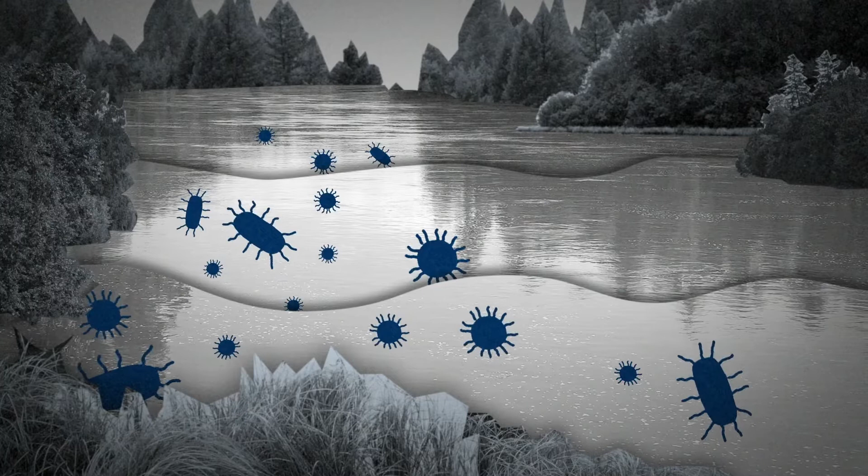In the second half of the 19th century, the German chemical engineer and hygiene pioneer Max von Pettenkofer formulated the concept of natural self-purification. With this term, he referred to the biological degradation of contaminants and pollutants in water bodies using the metabolic properties of bacteria and other microorganisms. In simple terms, microorganisms use contaminants as food and thus convert them into water, carbon dioxide, and nitrogen.

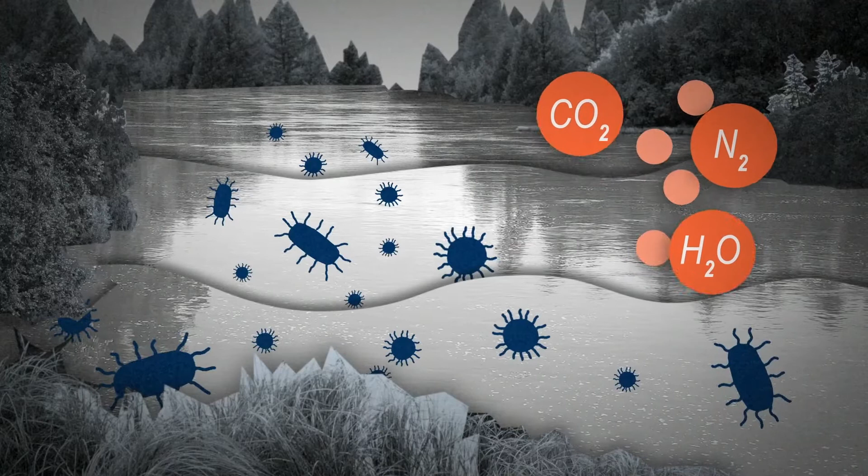This gave rise to the question of how much contamination a river or water body can absorb before it stops purifying itself, and excessive pollution, also known as eutrophication, takes place.

Max von Pettenkofer also demonstrated the connection between hygiene, drinking water quality, sickness, and the spread of diseases. To support his theses, he exposed himself to cholera in a self-test and survived it without serious health consequences.

His ideas led to the construction of the first sewers and wastewater treatment plants, initially in cities only. Today, every biological wastewater treatment plant uses the natural self-purification process described by Pettenkofer.

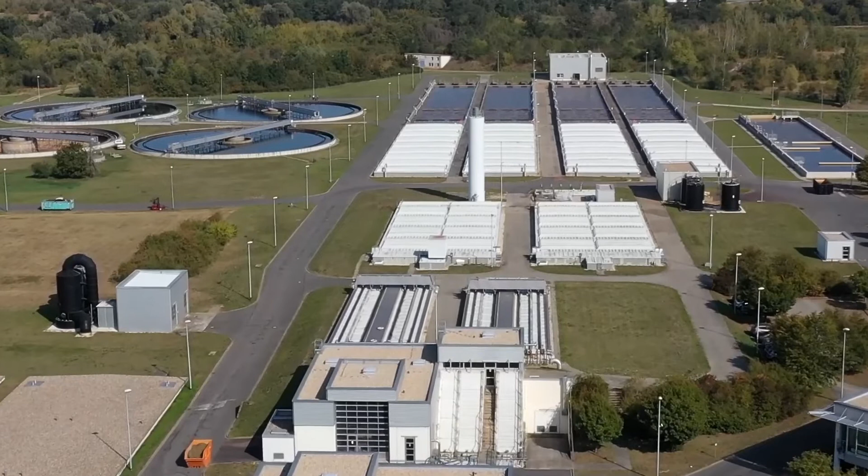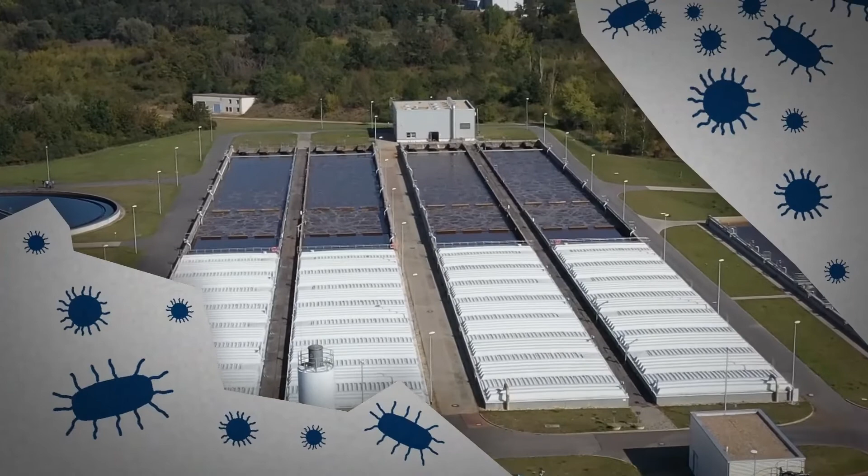A difference to naturally occurring water bodies is that in wastewater treatment plants, a near-perfect environment can be created for the bacteria and microorganisms to thrive. This increases their number to a maximum and highly accelerates the natural self-purification process.

The size of a treatment plant depends on the amount of wastewater occurring. Typically, the wastewater to be treated stems from domestic, municipal, and industrial use, as well as from rainfall.

Wastewater contains dissolved and undissolved substances, which can be of organic or inorganic origin. In some cases, wastewater also contains heavy metals and salts, which are dissolved in the water.

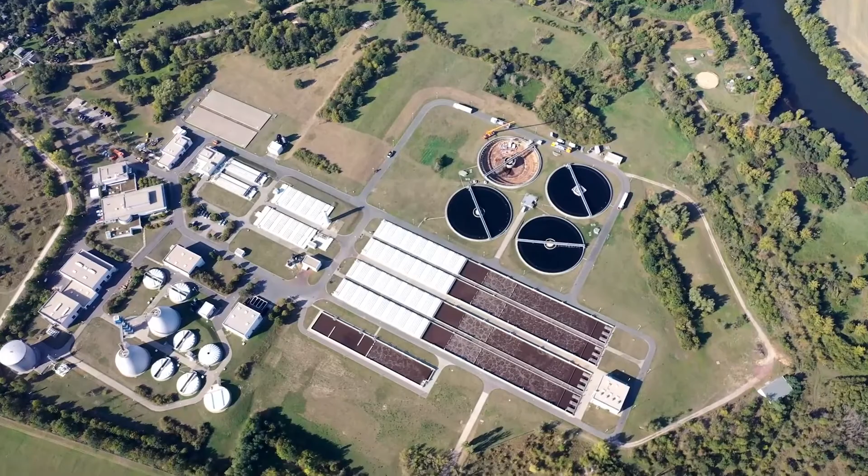Here you can see our modern wastewater treatment plant in Halle. Let's take a closer look at its structure. The treatment plant consists of 3 areas: mechanical treatment, biological treatment, and sludge treatment.

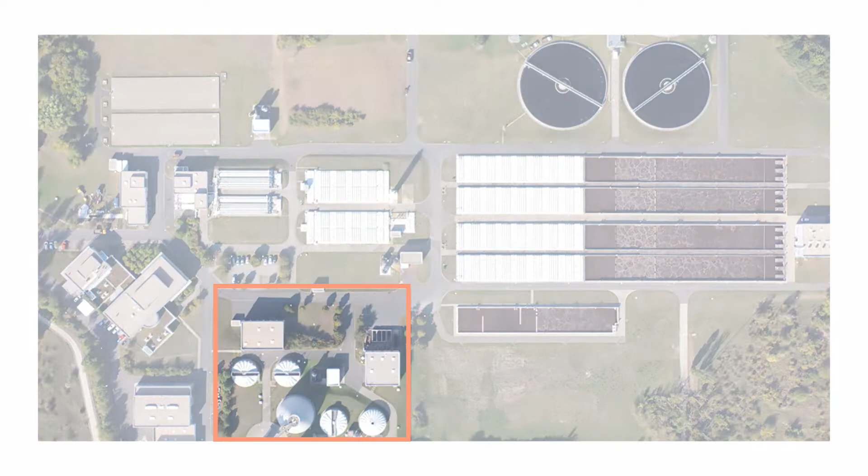Mechanical treatment starts with a screen, followed by a sand trap and grease separator. It finishes with the primary clarification. The aim of mechanical treatment is to remove all floating substances and solids from the wastewater.

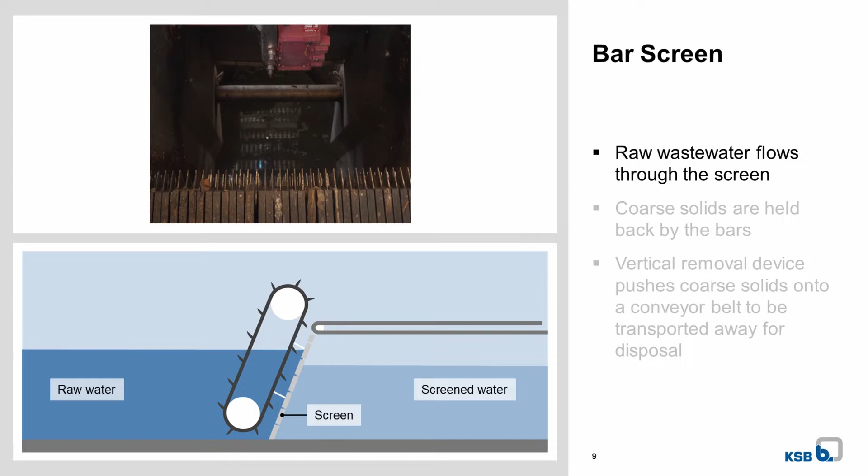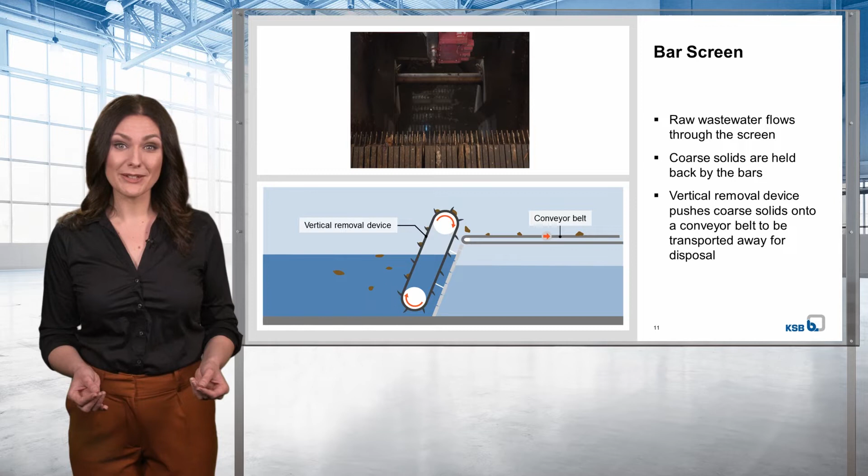The screen filters coarse solids out of the wastewater. It consists of fixed bars arranged at a defined spacing from one another. The raw wastewater flows through the screen. Coarse solids are held back by the bars. A vertical removal device pushes them onto a conveyor belt to be transported away for disposal.

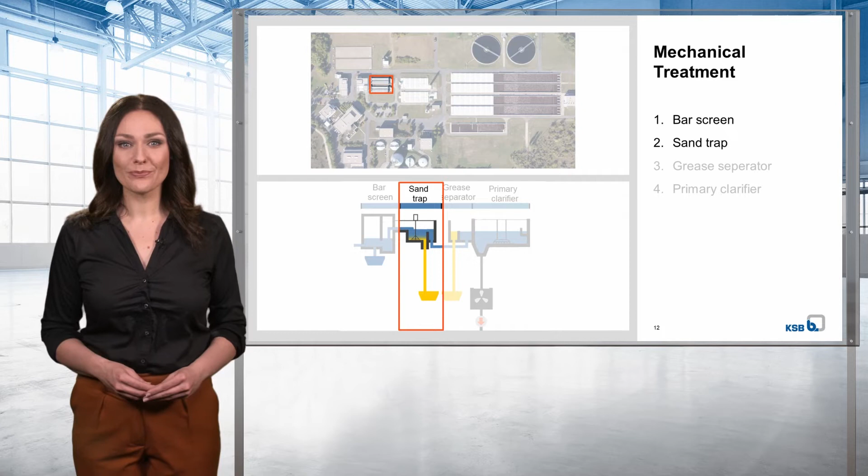The wastewater then continues to the sand trap, which can be either an aerated or a round type. Here you can see an aerated sand trap. Air bubbles rise from an aeration system mounted on the tank floor and make their way to the top.

This results in a vertical flow impulse in the tank and makes the wastewater rotate vertically, which separates heavy particles such as sand. Once these particles have reached the bottom, they fall into a drain channel, also called a sand trap channel. A scraper then pushes them into a sump, and some kind of pump transports it away.

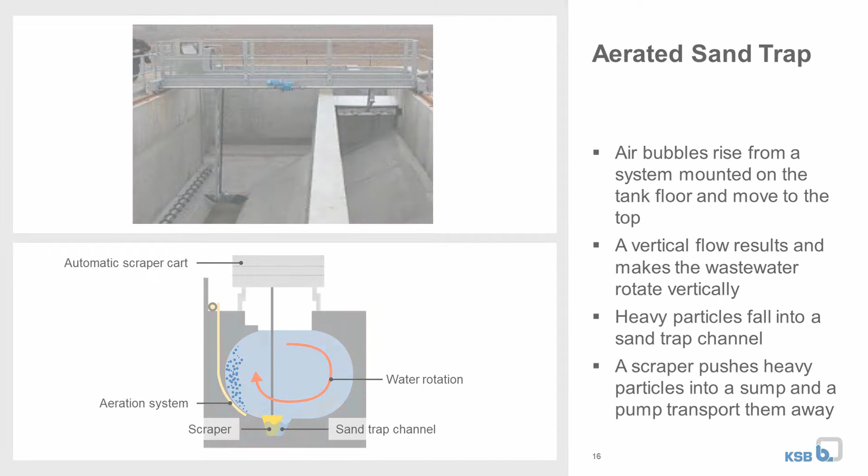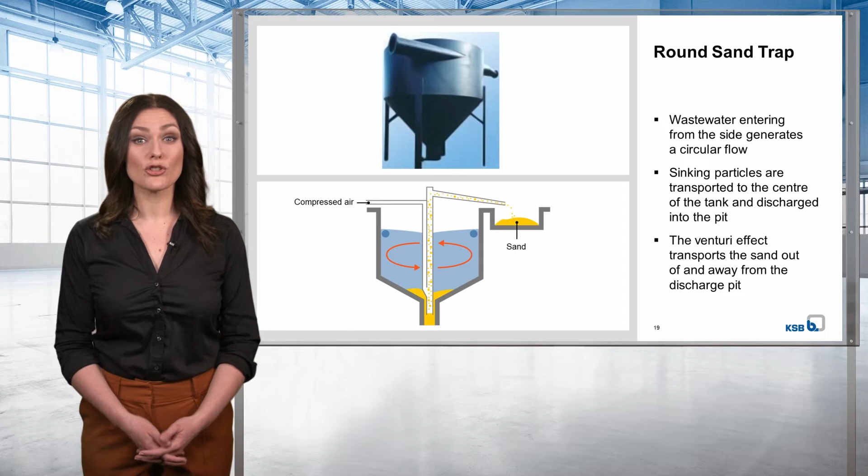Let's look at a round sand trap. In this case, the so-called teacup effect is used to separate the sand particles. The wastewater entering from the side generates a circular flow in the round sand trap. Due to the velocity distribution, sinking particles are automatically transported to the center of the tank and discharged into the pit. The so-called Venturi effect transports the sand out of and away from the discharge pit.

Which sand trap to select depends on various factors. Generally speaking, the round sand trap is more commonly used in smaller wastewater treatment plants.

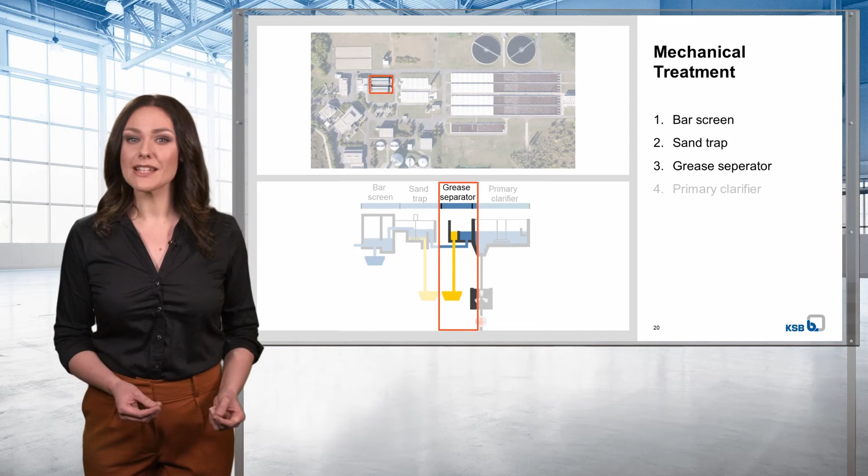The next step after the sand trap is the grease separator. Grease can be separated in either a round or a rectangular tank. The principle is the same for both tank designs. Grease accumulates and stays on the surface, from where it is later skimmed off with a scraper.

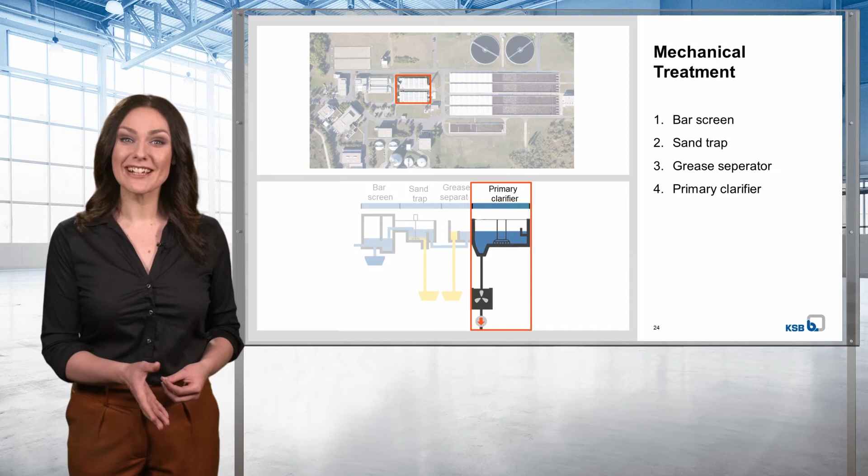The pre-treated wastewater is now guided to the primary clarifier. The primary clarification tank can be of round or angular design. Here, too, both work according to a similar principle. Light substances contained in the wastewater accumulate on the surface, whereas heavy substances collect at the bottom of the tank.

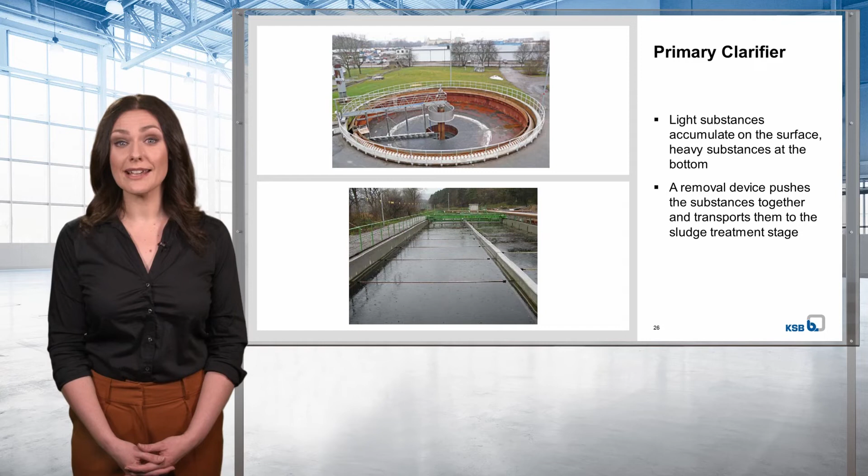The substances are pushed together by a removal device and then transported to the sludge treatment stage. Round primary clarification tanks are designed with a rotating bridge with a scraper. The scraper pushes the heavy substances to the middle of the tank, where they are discharged into the pit and transported to the sludge treatment stage. Light substances are skimmed off the surface.

In rectangular primary clarifiers, a sliding plate moves from the left to the right and back again. When the sliding plate travels to the right, it collects all floating substances up to a fixed plate. Everything that sinks to the bottom of the tank is then pushed into a pit by the sliding plate moving to the left. From the pit, the sludge is pumped towards further sludge treatment.

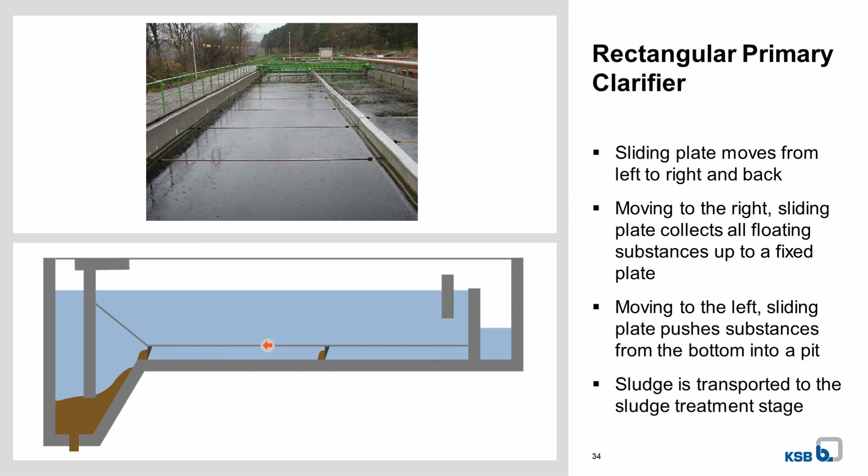The wastewater continues to the biological treatment stage. Now that all coarse solids have been removed from the wastewater in the mechanical treatment stage, microorganisms - anaerobic, anoxic, and aerobic bacteria - serve to decompose dissolved substances contained in the wastewater in the biological treatment stage.